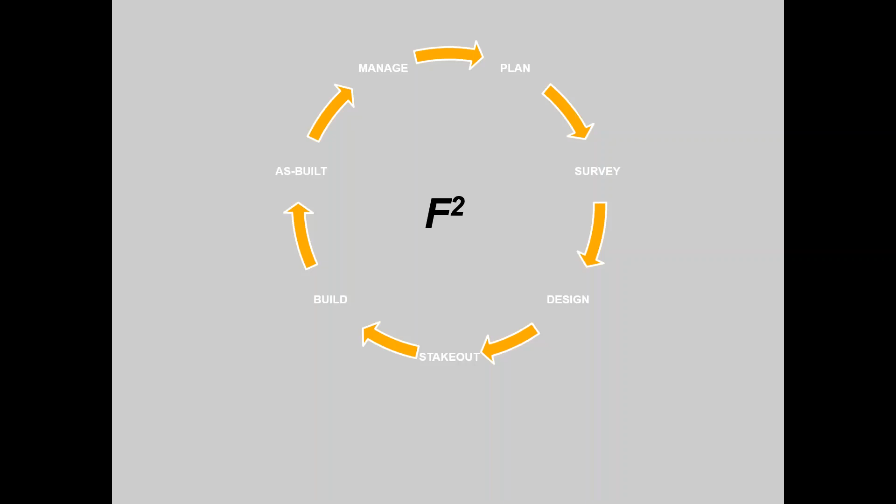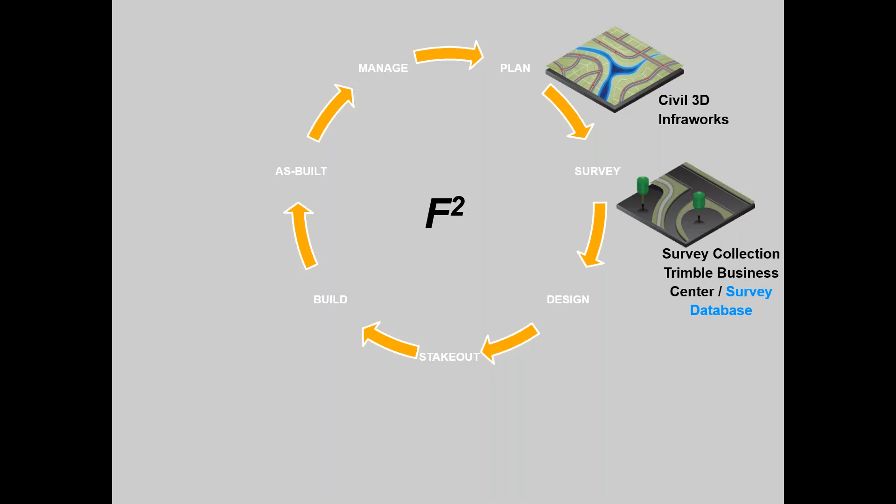So what does this look like? There's so much software out there that we need to understand to be able to work through a particular project life cycle, where we might be planning with Civil 3D and InfraWorks, because as a BIM tool, we're able to integrate data sources. We'd be surveying, as an example, with any survey collection software. This can be Survey Pro, this can be Trimble Access, through to analysis software like MicroSurvey or Trimble Business Center, and the utilization of a survey database to store historic information, all contiguous in one location, as well as perform repetitive calculations and produce that through your CAD and GIS software to make it available.

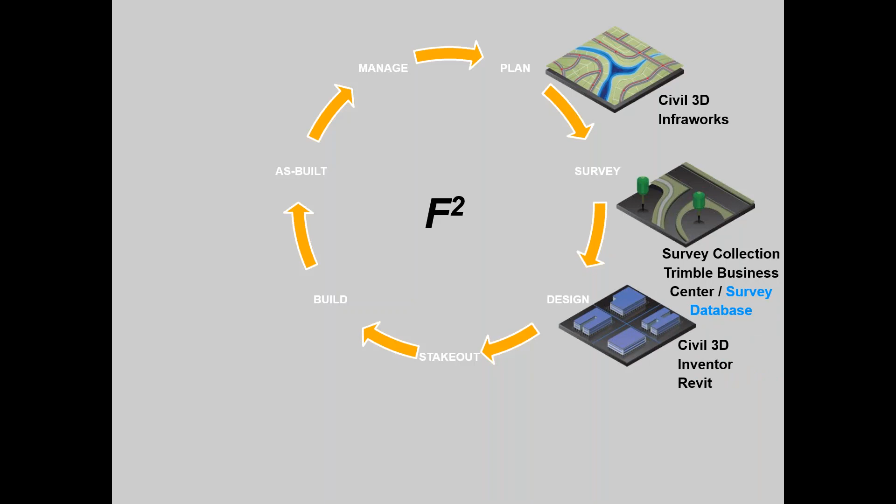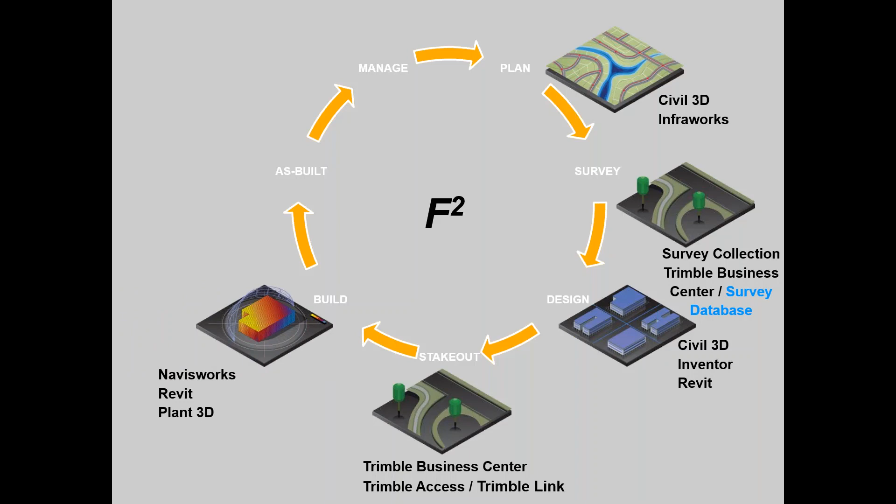We design using tools like Civil 3D or Inventor or Revit. And how does that tie back through our survey data collection and our survey database? Stakeout using Trimble Access and of course Trimble Link to potentially produce that, or export the data to other formats that would be compatible with something like a Survey Pro. We build that in the field using construction management tools like Navisworks and as well continually do analysis with Revit and Plant 3D to ensure that we're meeting design criteria and standards.

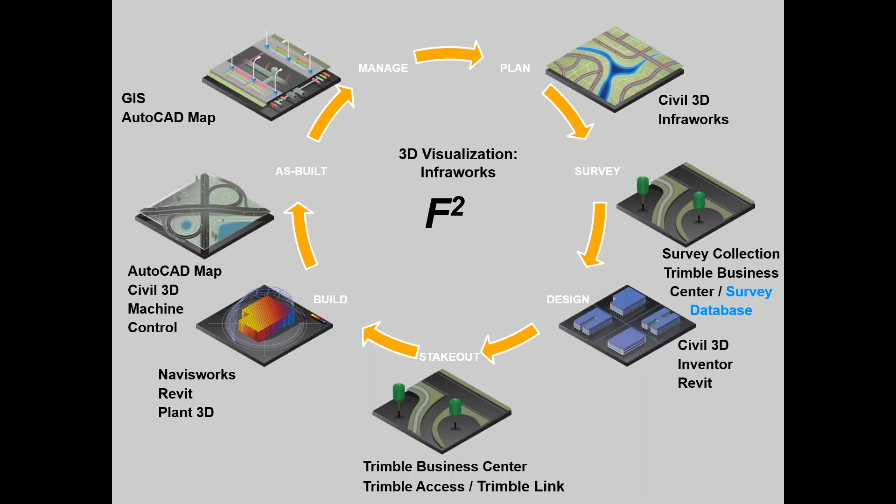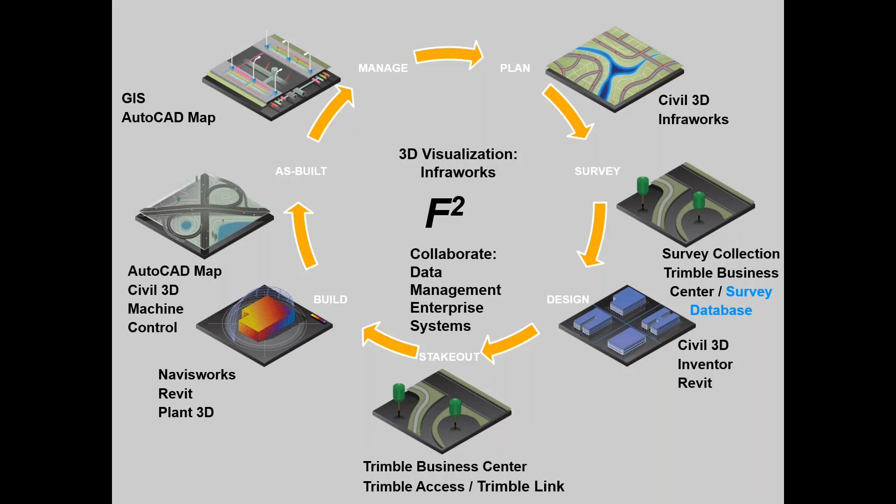Then we collect data using machine control and as well survey collection and importing information utilizing tools like Civil 3D and AutoCAD Map to map that as-built condition, manage it using our GIS systems and our database systems and our data management systems, as well now visualize all that using BIM models in 3D and 4D, and collaborate using data management and integration with enterprise systems such as financial. So this is all a lot for many organizations to understand and to begin to have the data flow right from the time that surveyor picks up that information in the field to be able to flow through this entire life cycle and be compatible without reinventing or losing data value at each stage.

So here's where technology integration and implementation based on business and technical requirements come in, to be able to not lose data value at different stages of the process. So Cansel torture tests this, and we believe that we're in a great position to help in real business and technical situations. And we've created a body of knowledge and systems that can be tailored to work for your business. So we already have the body of knowledge created, and we'll partner with your company until it works, and we can offer safe harbor through that change because of this body of knowledge and the experience of our 20 plus, 30 plus technicians and professionals throughout the company and the country that can help you locally.

So through site planning creation, so often we see that due to lack of compatible systems, you're reinventing the wheel. You're connecting the dots, you're move, scale, and rotating, you're attempting to line data up that isn't being transformed, and you're inserting labels manually that aren't being driven by data, as well as blocks and attribution, and interpreting or reinterpreting data at each stage of the project lifecycle. And we really want to ensure that we can smooth that transition in between each of these stages and define the responsibility center for what happens at each stage.

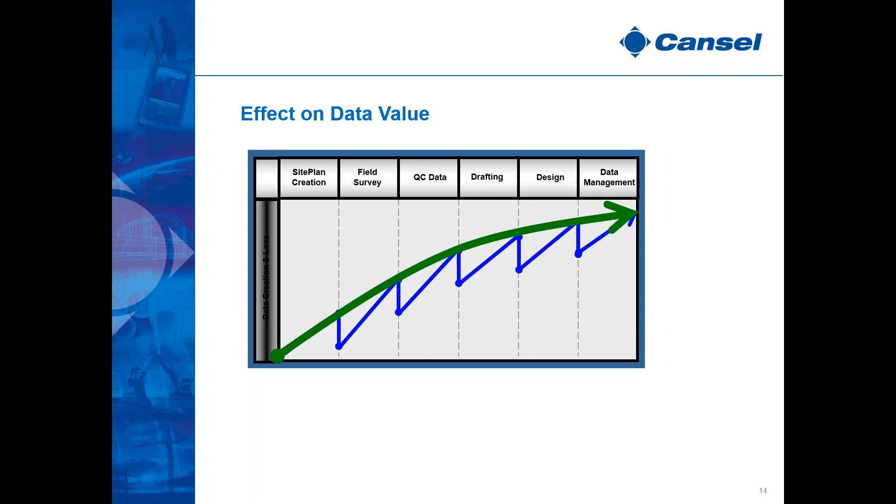We all know that there's a direct return on investment for understanding how data flows right from the field through to your deliverable. And in many cases, a small increase in field time can decrease your office time substantially, and in some cases, eliminate it. And we're definitely at the stage now where we make the decisions whether or not something even makes it to a CAD station or a Civil 3D station, and we can accomplish more and more in the field. And so there's a direct return on investment that's been recognized in the industry through things just like line work creation or proper attribution, but it's really defining what that finish line is at the outset in order for you to decrease the amount of revisions that are required to achieve your end deliverable.

So here is a walkthrough of a survey CAD workflow example where Cansel has torture tested this workflow, related back to the workflows that we had been talking about, and it's applicable in many cases where our initial base plan creation is defined. And it's because of that pyramid where we know what the coordinate system is that we have source and destination data sources that initially form our project for planning purposes or preliminary to surveying a particular site, so that out of the gate, everything is pre-connected and predefined from source to destination,

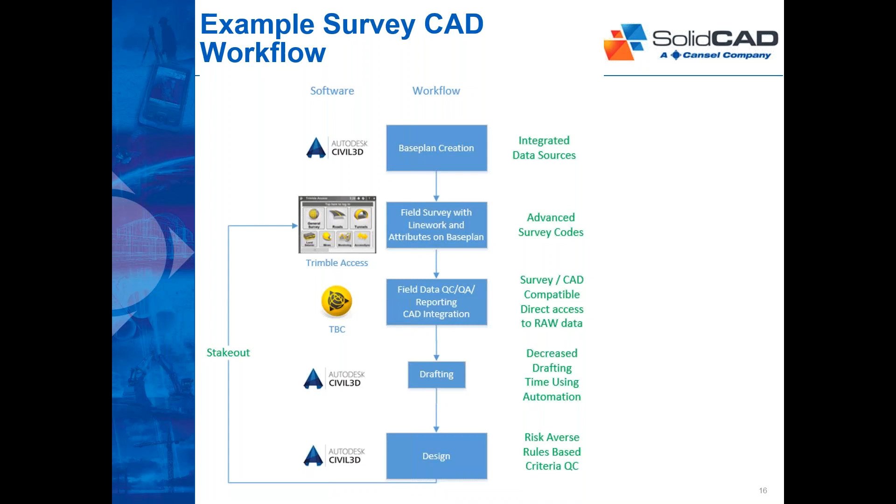So survey CAD at this level then becomes compatible. Because we've defined our destination, our field data collection, our QC/QA, our reporting, all is understood that we are absolutely going to integrate with that CAD system. We know that our CAD system is our destination for that survey data ultimately, and that there is responsibility of the surveyor to produce that data in a way that is directly compatible with that CAD system, so that it's not up to the CAD draftsman or designer to make decisions on survey data for things like break lines or even surface creation for existing ground, and that it's directly compatible to that raw data.

And we make sure that if the data comes in through your survey data processing software, or if the data comes directly into your CAD software, it is the same. It produces the same results. So if you're doing a topo survey and you don't require a surveyor to do much interpretation, that can be directly delivered to your CAD system, and it looks exactly the same, completely compatible backwards and forwards through that system, which ends up decreasing drafting time. And that's what we really want to do here: we want to decrease or eliminate as much as possible the drafting side of the equation. Not necessarily the design part of the equation, but the drafting part of the equation.

So we should be able to decrease or eliminate drafting time based on using advanced survey codes in the field. And this then lends itself, because these features know that they potentially are going to be used in the design process, we get you as close to the finish line as possible, so that that data pickup can be used directly by those design objects as required to create your finished ground or your finished object. That could be utilities, it could be pipes, it could be subdivision, it could be a road.

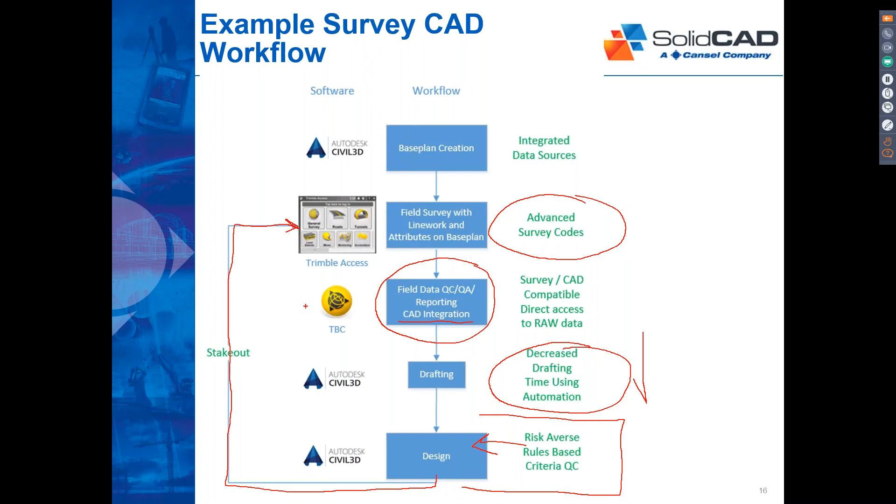So here's an example of that integrated system, starting with your base plan. There is our external GIS data that is in multiple source coordinate systems, but we can then have those pre-attached. The coordinate system source is predefined, the transformation is predefined, and the stylization requirements are predefined, so that you're only turning on those source data, and the intelligence is remembered in the data connection, not in you starting a template from scratch and attaching these data sources from scratch and trying to remember all of the source and destination requirements every time when you're doing something that's repeatable.

Here is your historical survey data that's stored in your historic survey database that's already had the calculations applied and has all of the attributions that can lead it right back to the original source project that was used to create that survey data, so that before you're going out in the field, you have a visual record of all of the surveys that have been done in that area, what their dates were, what their purpose was, whether or not they're as-built or not, and if you can utilize them to make your new survey process more efficient.

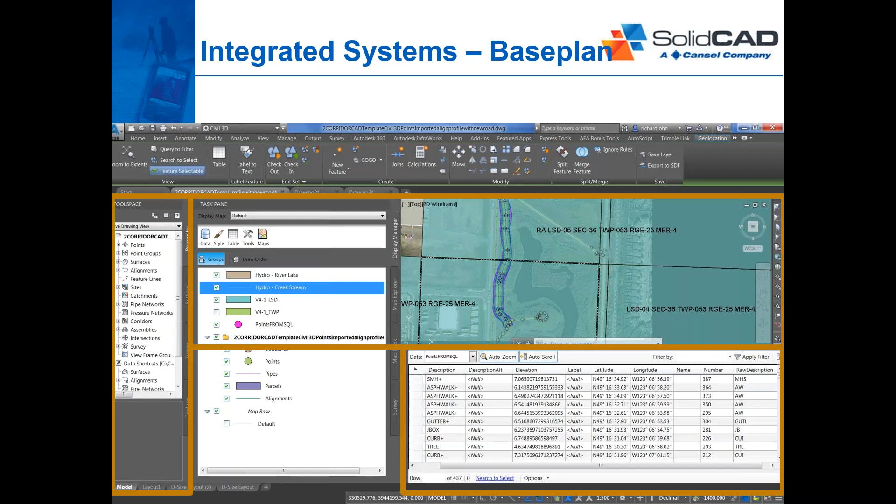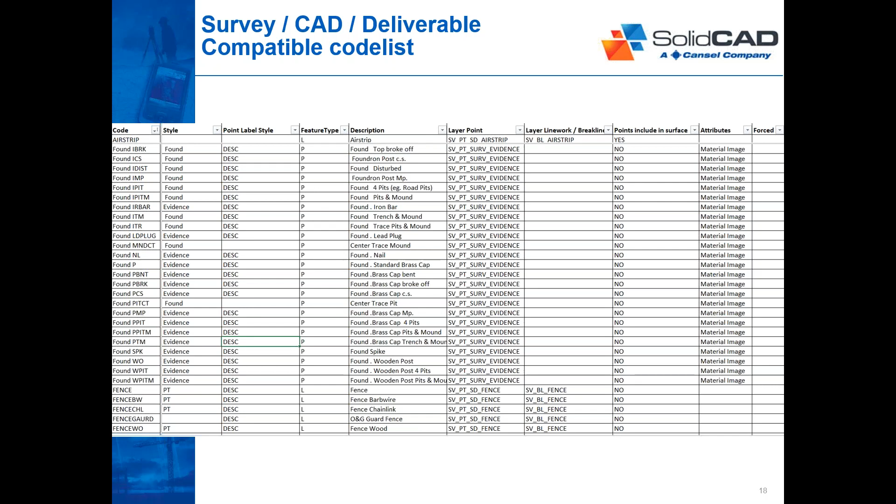So here's an example of a code list that identifies all of the requirements from picking that data up through to the stylization in your CAD system and the type of feature that it is, line work or point or both, right? Because of course it can be both. What the description of that thing is, what it's going to end up in your CAD system as a layer for a point or a line, whether or not it's going to be included in a surface, what attributes are available, what attributes are forced, and this goes on, so that we can come up with a contiguous, compatible code list that works through that entire life cycle and is identified up front for your source and your destination through to understanding what that deliverable is.

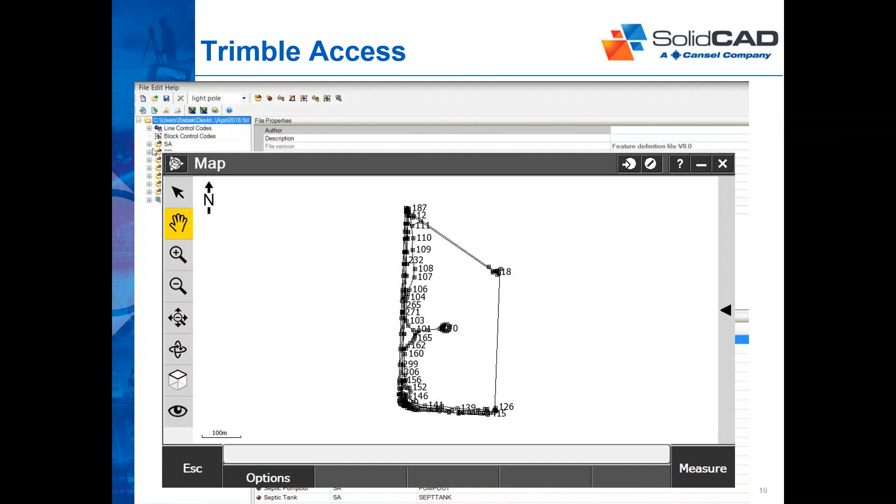This is then, of course, back compatible through your survey controller software. And when you pick up that data in the field through something like Trimble Access or Survey Pro, then that is the visualization of that. And then as it moves through that life cycle, it looks the same, it's identifiable. There's no loss of data value when you bring that through the next stage.

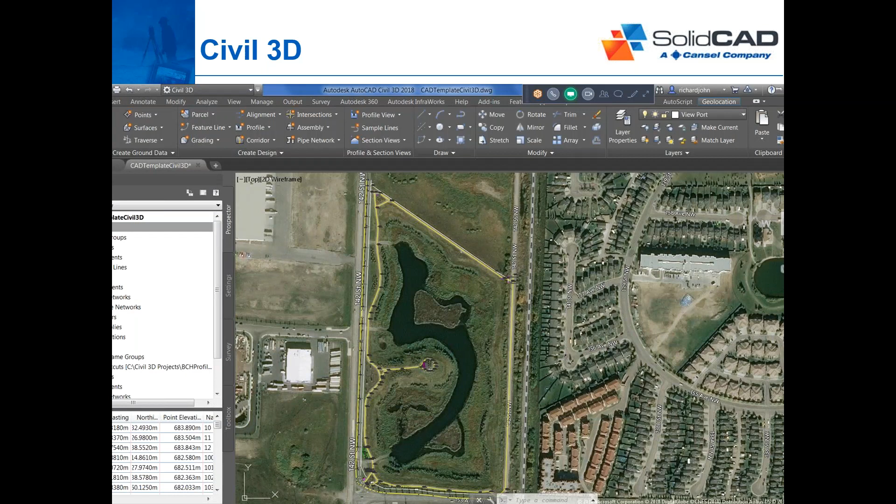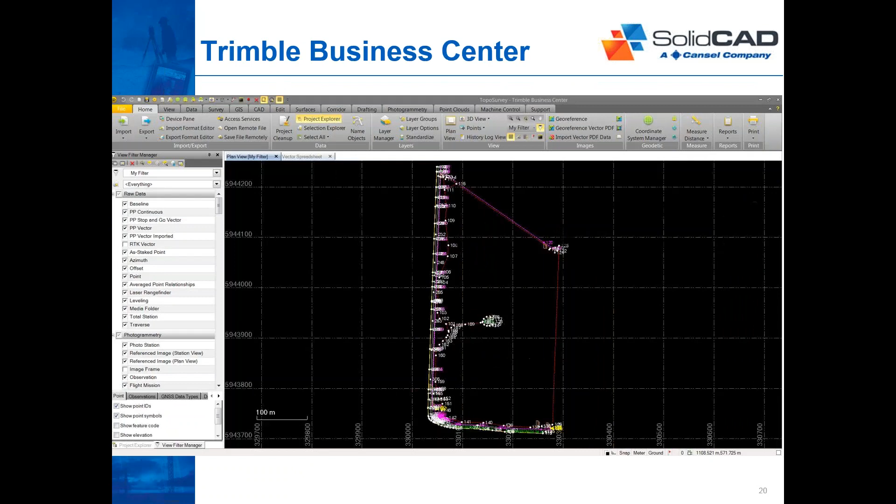Once that design is produced, there is definitely a division between what is a surveyor's responsibility and what is a designer's responsibility. I'm not saying that can't be the same person. In many cases, it can. And we do have PEs that are registered land surveyors that can and do this entire process and can sign off on it at every step of the way. And that's what integration does for you.

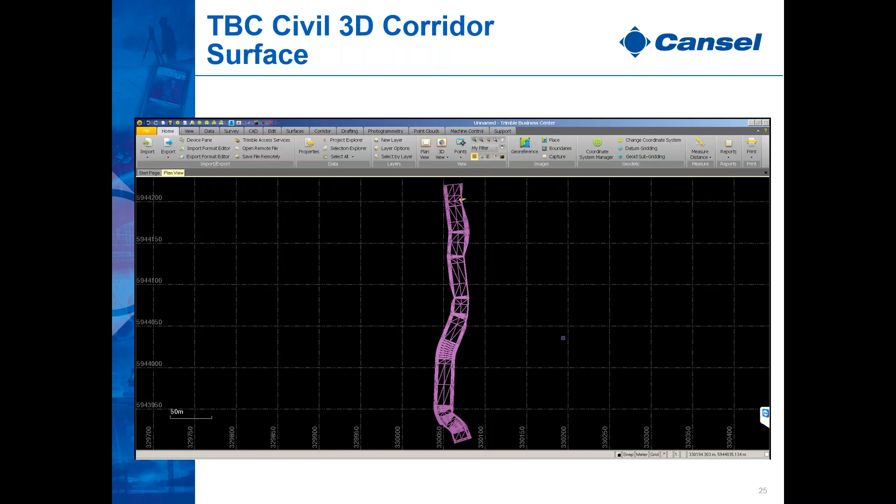That then, as an exported stakeout surface, is also compatible and understandable and recognizable through the system that's producing it to stakeout, so that we're not looking at apples and oranges through this process. It's not points, it's an actual model that we're staking out. And then there it is inside of the stakeout software. So again, we have the survey data compatible, and now we have the design-to-stakeout for construction data compatible through this process.

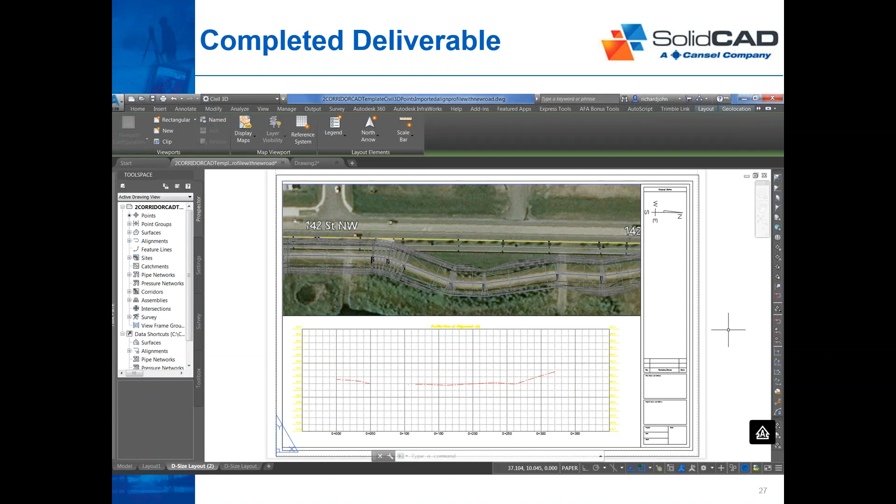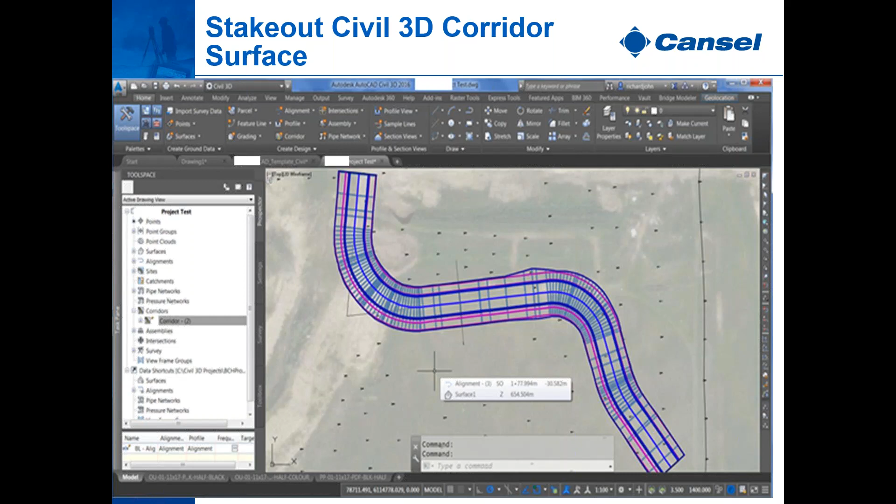So an interesting note as a lesson learned is that when we do Stakeout for something like an object, we then break up that Stakeout by the day's activities for the surveyor. So the surveyor should provide a Stakeout plan so that the designer can then produce the data in a way that makes them not have to do interpretation in the field.

So as an example, this is an entire corridor that would be exported for a Stakeout activity very commonly. So they just export everything. Say, here you go, here's the whole design. But we prefer to stake it out in something that's more understandable for that day.

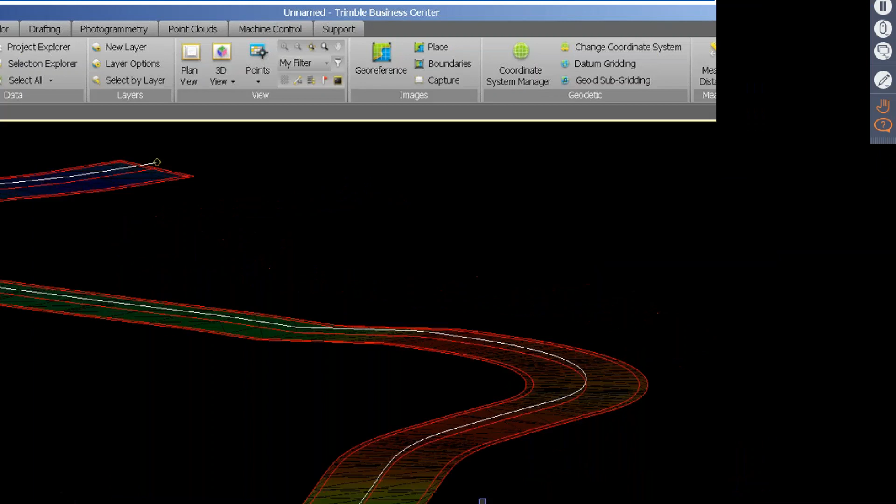So this is an example of doing curb stakeout, because we know that you're not going to stake out the entire road design or the entire subdivision all at once. It's going to happen based on a base, a sub-base, curb, and then asphalt. And that's all going to happen in a particular order, and it's never going to be done all at once.

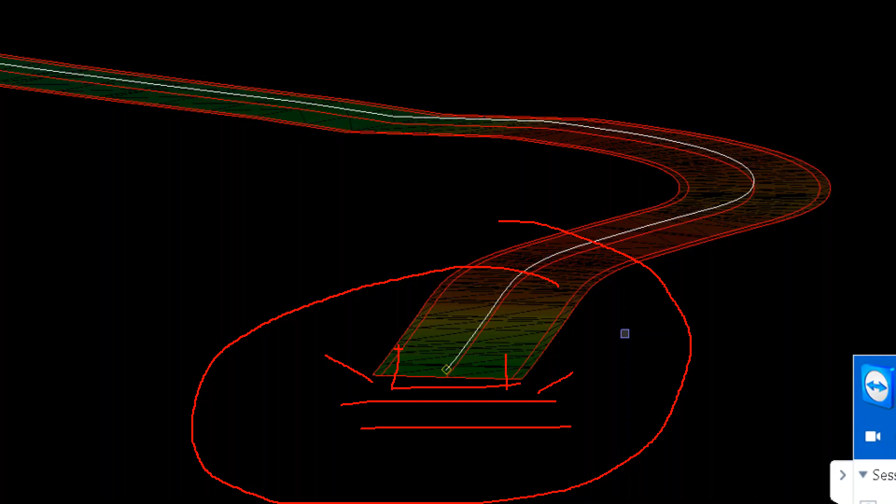So by the same token, where the CAD designer shouldn't have to be interpreting the survey data, the surveyor shouldn't have to be interpreting the CAD design data when they do that stakeout. It should be based on a plan, and it should be exported in a functional way that allows the surveyor to not have a bunch of interference or distraction when they're doing that stakeout. Because when you're out in the field, that can lead to incorrect decision making or errors in stakeout.

And really, we're working towards reducing the potential for error, which reduces the potential for risk. And that leads to not having to call the office to understand what it is that happened here at this particular time for this particular location and send it back potentially for revision. This makes it very clearly defined what happens and in which particular order it happens.

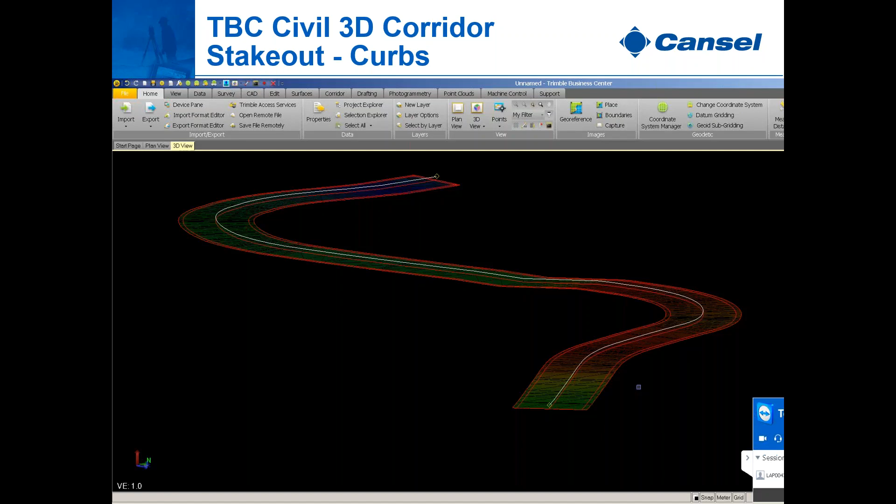And there is that curb stakeout then in your stakeout software without all of the rest of the corridor or road design information in there that's not going to be used by the surveyor on that particular day or that particular time. He could have access to all of the different plans, the stakeout plan outputs, exports from your designer, so that he could reference them. Of course, he could have access to the entire thing, but at least this provides them with a finite body of work that they know they need to accomplish in a particular period of time.

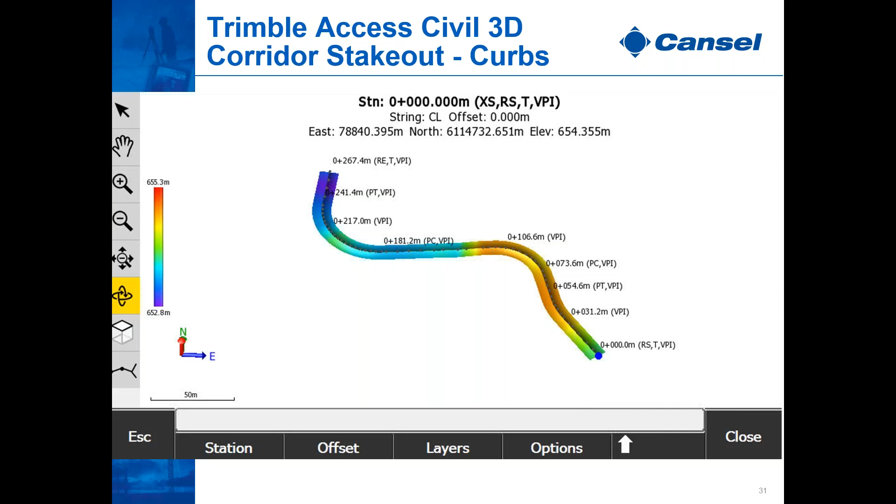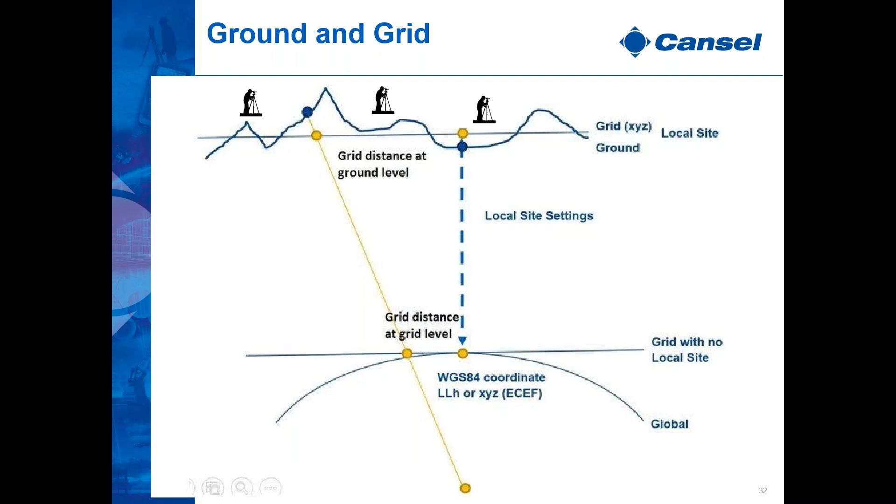Site considerations. So we've moved through, but at every point, there's always site considerations for topography and ground distances versus grid distances. And we looked at before what some of those criteria were for driving our decisions for that base level of coordinate system decision making. And we know the distance from the ellipsoid can affect ground distances versus grid distances, and we have to understand those in context of your particular site. But it does allow you that basis in decision making.

So for every site or every deliverable, we go through a matrix of decision making criteria where we decide right up front what the deliverable is going to be in, ground distances or grid distances. For construction, our general rule of thumb is that we survey in ground, we design in ground, and we stake out in ground.

And I can't tell you how many times we've gone back and forth with different organizations attempting to work out what this really means for them and why they're surveying in a particular coordinate system or datum, and what is happening when they're doing design, whether they're designing in ground coordinates or grid coordinates, and then how that translates to stakeout. And there's different factors, as we just said, but surveying in ground, designing in ground, staking out in ground.

Source data is transformed to the project coordinates because that's the lowest risk. So if you have source data that's coming from somewhere else, your project coordinates are the number one consideration, because we don't want to transform that, because we know that every time we do a transformation, it introduces error. So we're attempting to decrease the amount of error that gets incurred with your project, and understand that your source data, if there are external data sources, is transformed to your project coordinates and not the other way around.

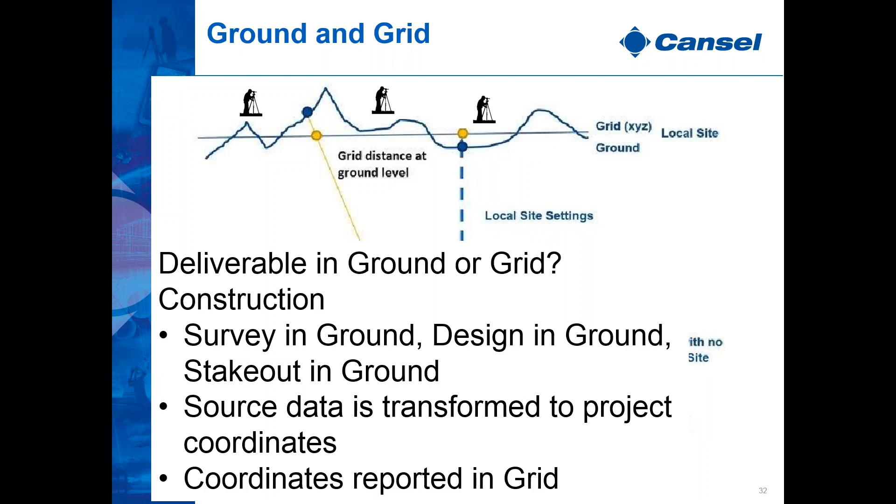Survey control. It's another matrix that is always considered when we consider that base level to produce this information through this integrated system. And is there provincial monument control? Is there access to VRS or network RTK? And is this a provincial ACS system, or is it private? And is it certified by government, or is it not?

Is there more control required for sites? Is there local control available? And is this CSRS, or is it original? Area by area, project by project, we define what these requirements are and come up with a system for producing that deliverable and documentation to support that.

Interesting that more often than not now, because of the capabilities of the survey and survey analysis software, often we never leave the field. It is very possible and realistic now to consider what the surveyor is doing and understand whether that needs to be brought back into office or CAD-based software in order to achieve your deliverable.

Very often now, we can do existing ground survey in the field, create the profile, create the grade, look at it in the field. The surveyor knows the grading requirements, and can produce that finished ground surface in the field and load it onto your machine control for stakeout and grading. And that can all happen in the field. It doesn't even have to make it back to the office anymore.

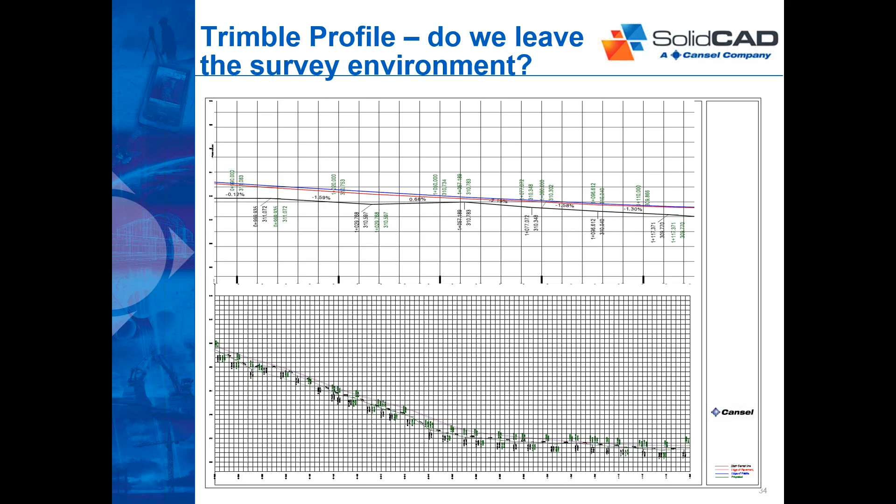And then if we need to produce the plan, we can also produce that plan in the field, or the surveyor can produce that plan easily now, without necessarily having to go back to another piece of software in order to do that. So here is where survey and some design can occur without leaving the field or without leaving the surveyor.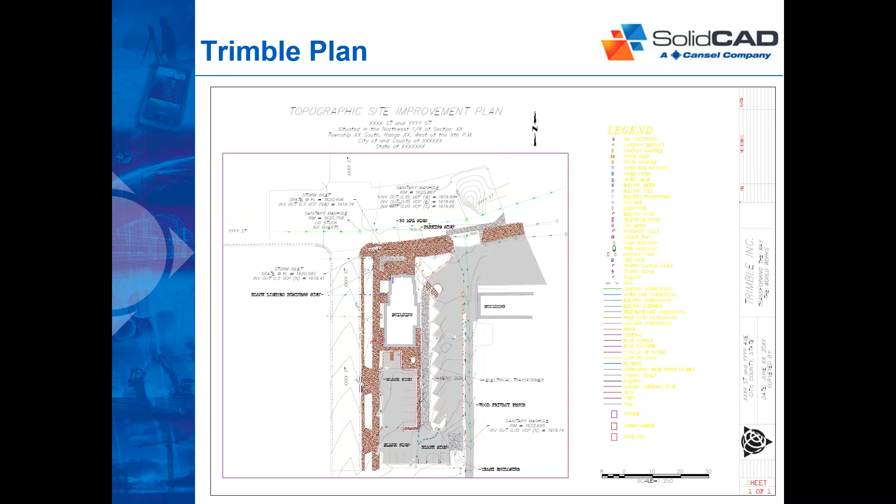QC/QA, survey reporting, again, something that doesn't leave the surveyor's hands. The surveyor knows what the requirements are for his project, for QC/QA, and they're able to produce that inside of that survey analysis software.

And it needs to be a consideration when you're looking at integration, whether or not your existing software package can produce that level of survey reporting, or if you now have to move it into another package, risking loss of data value, risking errors for translation, to be able to produce that QC/QA report. So again, as you move through the life cycle, ensure compatibility based on what your deliverable requirements are.

Survey database, key. You can perform calculations that are repetitive inside of a database automagically. As soon as you load that data, it will perform the calculations required and store them for future use without having to load it into a spreadsheet, do a bunch of calculations in a spreadsheet, and then kick that information out, and then attempt to reload it after you've done the calculations into your survey

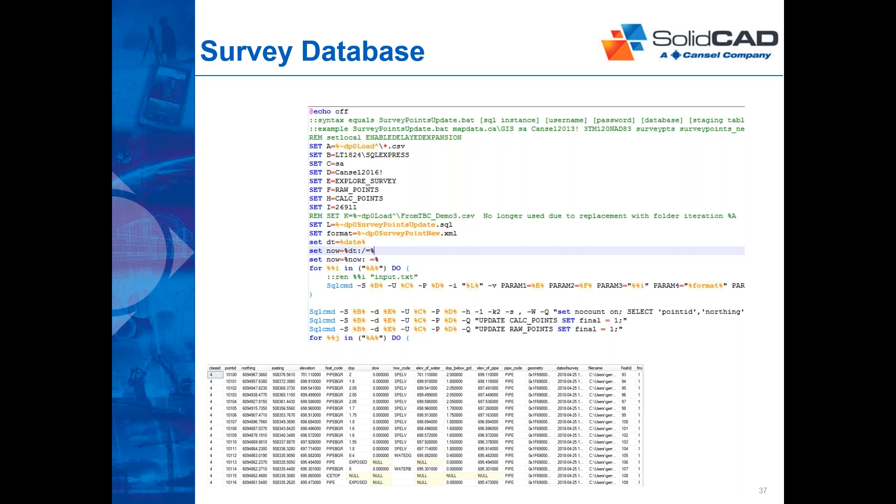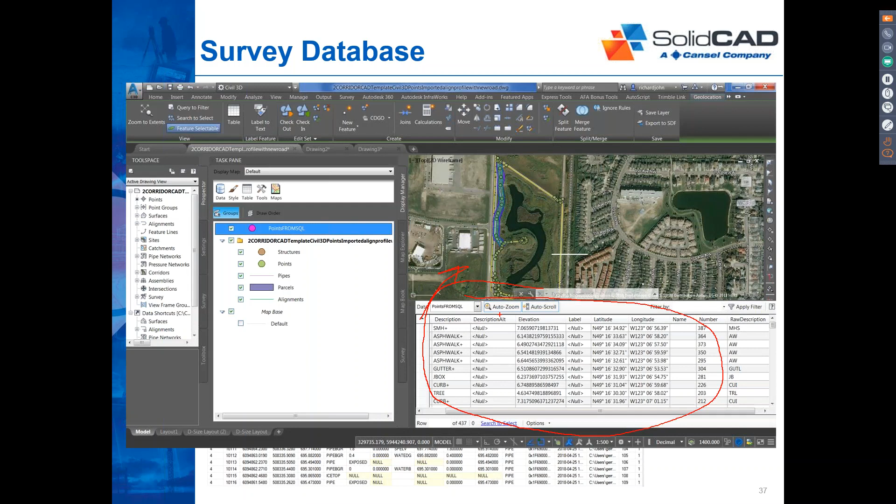analysis system or your CAD system for that matter, because this is directly compatible with your CAD system and you can bring it in and visualize it and use it, and as well export it out for stakeout or to a CSV or for another package. But you can then export it for stakeout directly and preload that data into your controller based on historic information. You can reshoot the alignment, you can double check locations, you can ensure validity of that data in order to reuse it.

So Cansel has developed a workflow optimization body of knowledge that's a structured method that we use to help our customers analyze their existing process and prioritize what their focus areas are for identifying those improvement opportunities. And we maximize the use of your existing tools and technology first in order to understand what the cost benefit is for changing and come up with a plan and establish that implementation strategy based on real business value.

Generally speaking, we work through a discovery process, an analysis process, and we produce a report and a plan together to work through change management, time to train staff and have them familiarize themselves with whatever is new versus whatever was old. We attempt to utilize existing business processes and technologies and build upon them where we can, and then where we need to augment or change, it's explicit, and we provide you that within the context of what your deliverables are.

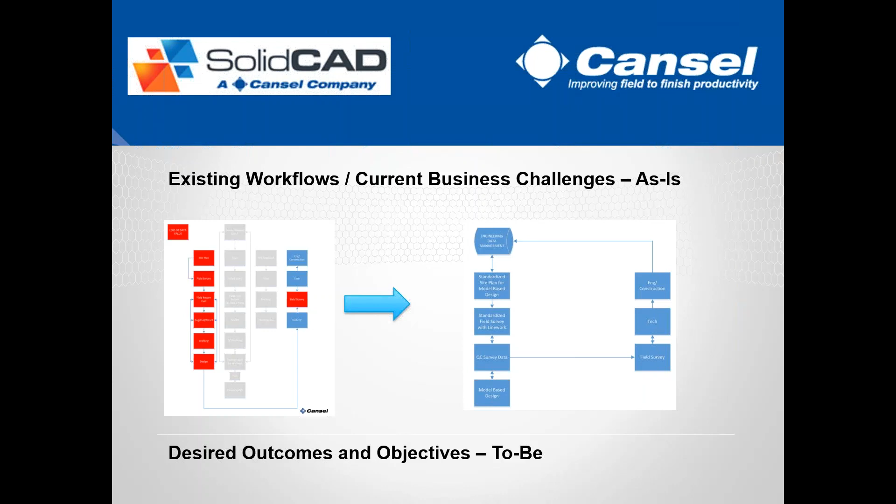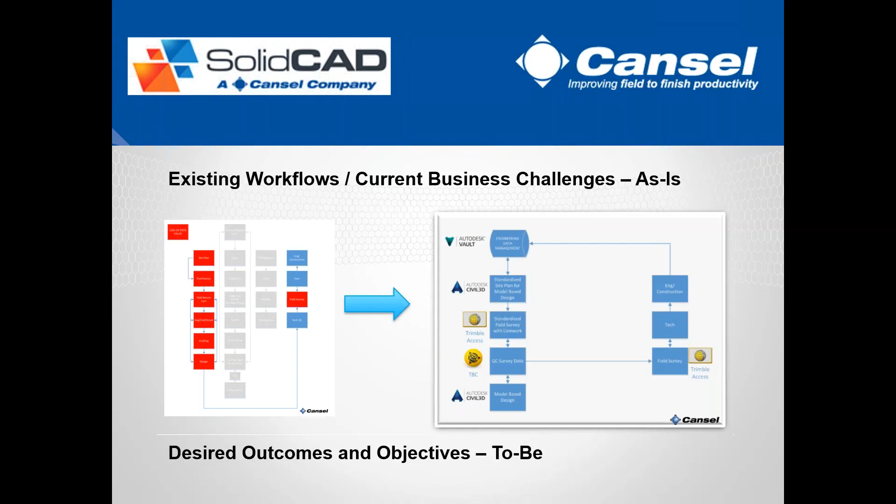So we do map your existing workflow, identify those areas where you have current business challenges, and create an as-is process. And then through that, we work to a to-be process to identify where those bottlenecks and changes have occurred, and to transparently and explicitly state where there is going to be cost savings and decreased risk. And here's the example that we just worked through. It doesn't always look like this in terms of the software, but typically this is one example of what we can implement.

And as an overall schedule for implementation, it's not as onerous as you might think, because we are able to move an organization through this process based on our existing body of knowledge; these industry best practice implementations are relatively timely and straightforward in terms of the way that the process works.

So some of the lessons we've learned through working with our clients and doing many of these implementations: one is standards. When we're developing them, we want to get you as close to the finish line as possible up front. As soon as that planning starts and that surveyor is looking to go out into the field to pick up that survey for that job, we are implementing codes that are going to move through that process with the deliverable in mind, through every piece of software or every person that touches it and changes hands, so that it's recognizable, identifiable and standards-based, and you're not having to interpret what something is, especially not looking at apples and oranges in each stage.

So use the survey tools for the surveyor. If there's one thing that we found, it's that surveyors have tools that work very well, and we utilize those tools for the surveyors. And that doesn't necessarily involve the CAD software: QC/QA, accuracy pointing, points processing, points calculation, line work processing, surface creation, stakeout planning. And you notice that surface creation is in there with the survey software, not the CAD software, because the surveyor is making decisions about creating that surface all the time for that finished ground. And if you process it in the CAD software, there is potential that that interpretation might be lost from the survey perspective.

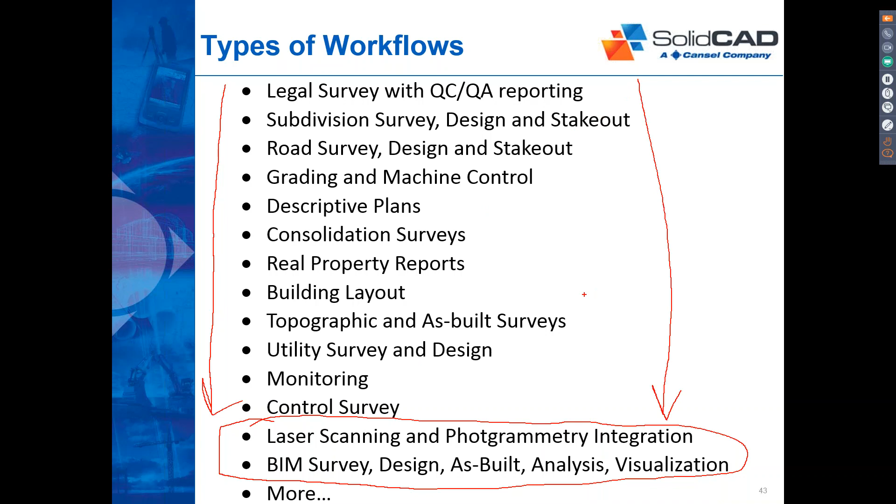So again, these are the types of workflows that we're talking about. It's not restricted to this list, but I do want to say that by doing these industry best practice workflows through these processes, it allows as a byproduct your BIM model and the integration of other survey methods such as laser scanning and photogrammetry, and being able to integrate that seamlessly through this process because you have done it based on defined standards and industry best practices.

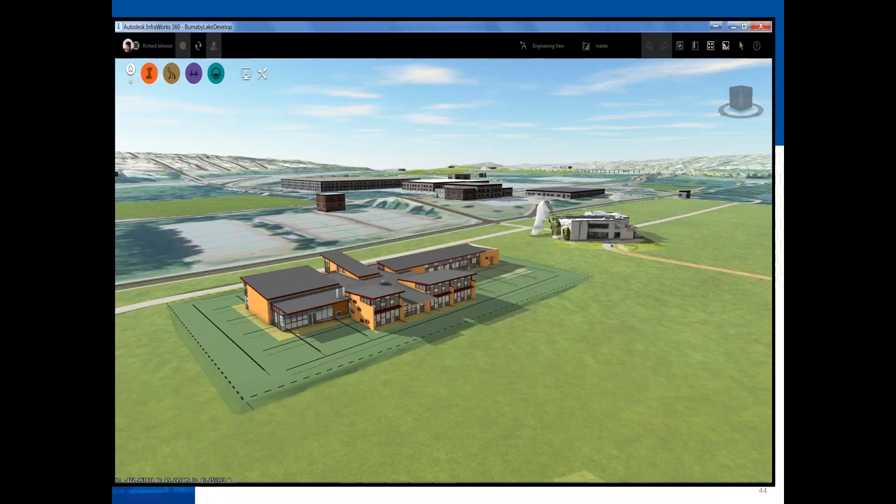So that you can then load this data into BIM systems in order to do analysis, to do design, and visualize them in 3 dimensions, and integrate things like photogrammetrically produced models from a survey drone or a Revit model for a proposed development, and see that in context of your overall landscape and plan, and this comes as a byproduct of implementing based on industry best practices.